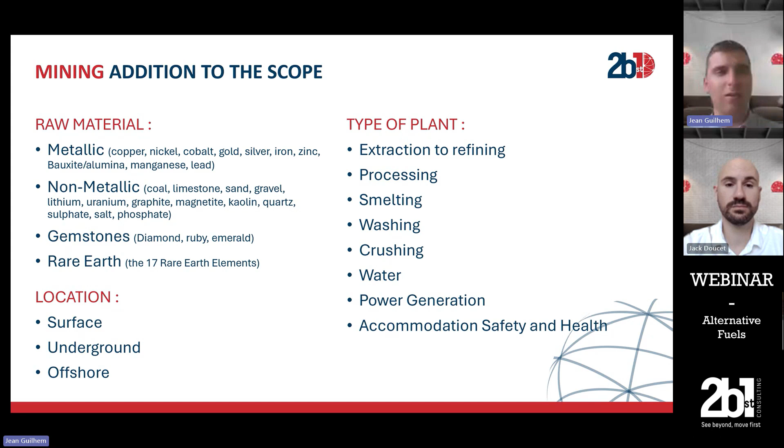Same story for the geothermal. It can be to power or to produce electricity or to produce heat. We'll have it all. The idea is you see between open loop and closed loop, or if it's a heat pump or power generation, etc. We'll have all the details of every model to make sure that our estimation of your product line and your service are always quite accurate.

So you will start to receive those news. If you have any question regarding the scope, feel free to come back to us. If you have any feedback regarding those estimations and that information, feel free also to come back to us. It will grow, of course, and by the time we get maybe some maturity, it will be our pleasure.

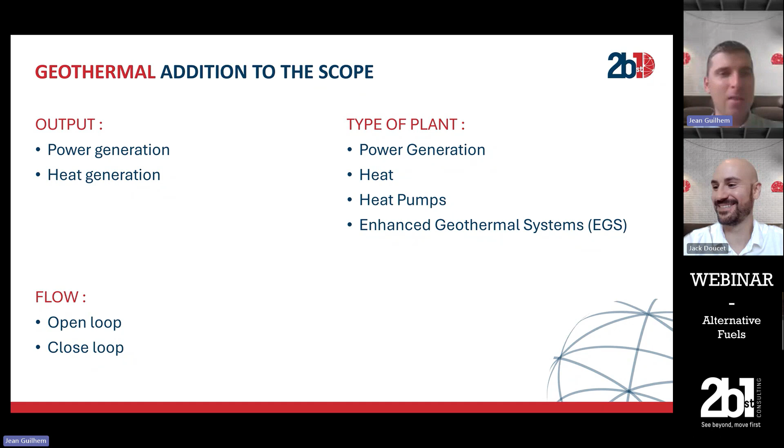Enough about those news, it's already quite a lot. As you can imagine, we have been quite busy this summer doing that. But like you, we like to take that time, which is a little bit of a slowdown, to work on our internal topics. Now going to the topic of alternative fuel, because that's the game for today.

The idea was to say, okay, it's really a hot topic. We hear it a lot. We see it in the news everywhere, but we hear a lot of mistakes about it, and a lot of approximation about this market. So what we really wanted to do first is lay down the definition of what is behind those alternative fuels, because people can sometimes confuse them.

In fact, there are 3, or let's say 4 words, wordings that we hear a lot about those alternative fuels. Here they are: biofuel, e-fuel, syn-fuel, and renewable fuel. While some are really quite different categories, it's not completely exclusive. Some are part of the others, etc. So we try to put a definition.

For biofuel, usually it's quite well understood. It's a fuel that is derived from biological waste. The first example that comes to mind usually is farming waste or plants — if you cut your grass, you're going to produce methane from it. Those fuels are quite great because they have a negative carbon footprint, because usually if you leave those wastes to perish in the air, they will transform to methane. So just by transforming them into CO2, you are reducing the carbon footprint. The main examples are, of course, biodiesel, biogas, bioethanol, which we can see popping up everywhere, especially in US and Europe. It's quite well understood.

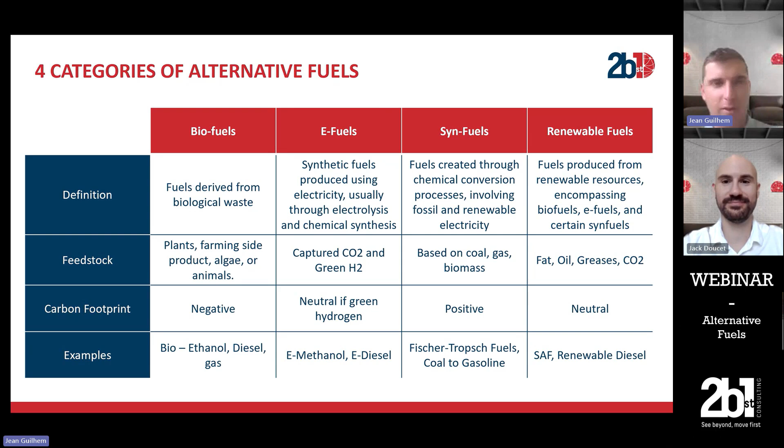I hope that's a high level definition. We can go into the details of everything, but we won't have enough time with this hour to do it. I think it's quite interesting to take two examples to discuss it—two examples that you have heard a lot of, I'm sure, and which are quite pragmatic because we are already using them. The first one is e-ethanol.

Which is a direct recycling of CO2 and H2, because ethanol is only two atoms of carbon and an atom of oxygen with the addition of hydrogen. And I say we're already using it because in North America, Europe, and also South America, you can start to see it, which comes in addition, in mix with gasoline.

In Europe, it's called E85. In the US, I think it's called super ethanol. So that's a kind of fuel which is already used not only in road transportation, but also in maritime transportation. And it can be used as a fuel, but can also be used as a feedstock for petrochem to produce plastic and other types of products.

And the good part is that when it's produced through a clean process, mostly using green hydrogen today, you can reduce this volume of emission by 90% compared to normal ethanol. So it's quite interesting, quite massive in terms of carbon footprint. Today we are not at this size to replace everything, but by starting to combine it with other fuel, you can drastically reduce the emission of other fuels that are mixed with.

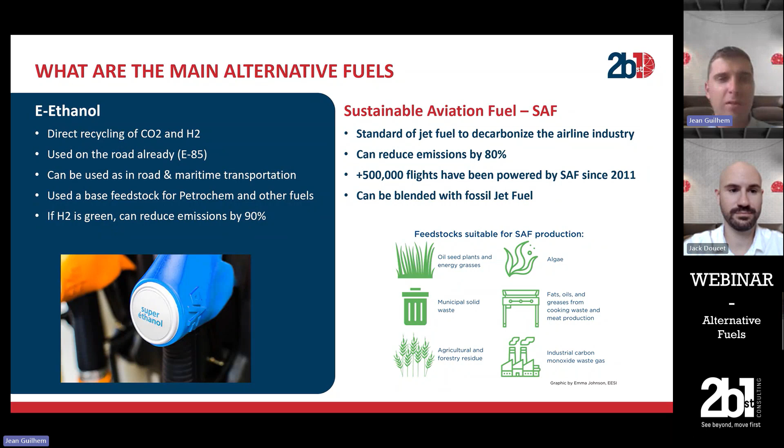So I'm sure those examples normally ring a bell in your mind—maybe not in your business yet, but be sure that it will come. Now, in terms of market and usage, it's good to say that it's happening, but how much, and what are really the use cases behind it, can be a question mark for you.

And in fact, when you think about the usage of those e-fuels, it's quite an efficient answer to climate change, because you can really reduce carbon emission massively, if not being neutral, sometimes even be negative. So it's quite a powerful tool if you think about it on the whole life cycle of the carbon. And the idea behind it is quite simple.

Today we produce fossil fuel, we extract the carbon from the ground, then we use it and it goes to emission. The idea here is, as soon as this fossil fuel is produced, to reuse it once, reuse the carbon molecule, and close at least once the loop of carbon.

You can imagine that it's quite virtuous in terms of idea. It works very well because that's less production you are going to have at the end of the day. The real idea behind is to use the carbon molecule as a vector of energy and reuse this molecule as much as possible before going to emission, and at least try to avoid those emissions.

It's also a good solution, especially if you're in Europe, where energy sovereignty is becoming a big issue, since you can reduce your dependency on imports from the Middle East, from Russia, from the US, by reusing the carbon molecule you already have. To do so, you need to create jobs to produce biogas, e-methanol, etc. So you can recreate value and jobs in your own ground while also reducing your importation from other continents.

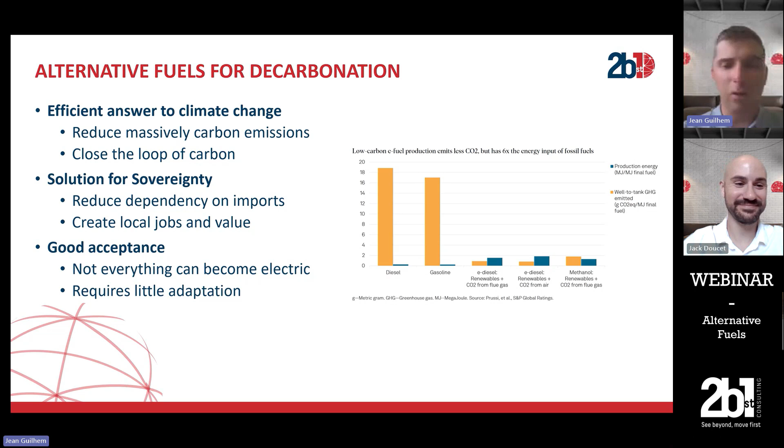So one of the ways out that producers are trying to push to political people is to say, yeah, we can push this to the market, make it profitable, and make people change to e-diesel and e-gasoline, but you just need to reduce the tax on gasoline. It's a big question, not sure if anybody has the answer to that, but that's a way out that could inject e-fuel quite actively and quickly into the market at a low price.

Now if you look at some news about e-fuel, you can see that it's attracting interest from all over the planet and from all different types of actors. Of course, the European Union said they will stop all thermal engines by 2035, the only problem being they're not sure how to do it. So the European Union is moving back on this decision and evaluating integrating e-fuel into the law, saying either you will use a thermal engine working on e-fuel or you will use an electrical car.

And I put both in parallel because you see that the brand Porsche is investing millions, and it's already active, investing to produce e-fuel for their cars, because it seems that Porsche's clients are not so keen on only driving electric cars. It's true all over the planet.

ExxonMobil is investing massively into renewable diesel. The US is one of the biggest countries for those kind of e-fuels. The Chinese are investing especially in SAF, a little bit like India. It's a little less true in the Middle East, we see less traction for those alternative fuels there right now, but I'm sure it will come. For example, when Saudi Aramco starts talking on the topic, they put big money on the table.

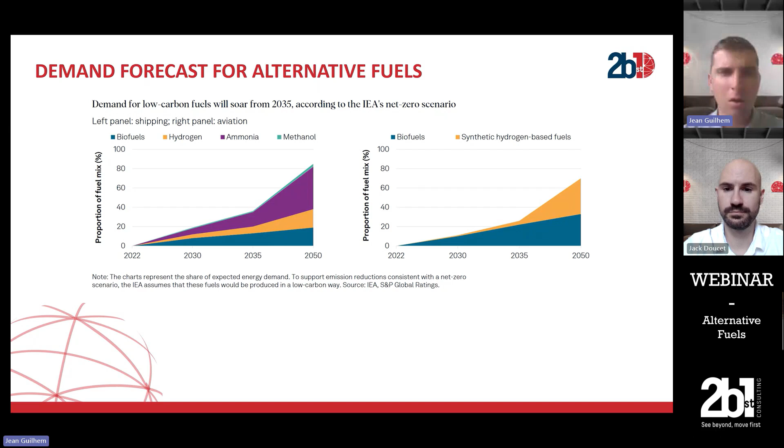If we look in the detail of those two examples, the airline industry - we all know aviation is a big contributor to CO2. And if you look at the new generation, there is quite a boycott around the plane. It's not true everywhere because every year we hit new records of passengers around the planet. But anyway, the spirit is not good, and the vision is not good. So they are really active into their decarbonation.

And to be honest, they have little solution outside of sustainable aviation fuel. Electrical planes are too heavy, so they just don't fly. And at some point they were a lot exploring the hydrogen fuel. But the problem is that if you want to have the density of energy to make a flight from Paris to New York, you need this hydrogen to be liquid. And as soon as it becomes liquid, it's a nightmare because the temperature is low, the pressure is high, it's super thin, so leakage is a nightmare, and the risk associated with this liquid hydrogen is massive. So it's not really practical to handle.

Also, one of the last issues is that the only company working on the turbine of hydrogen was Safran, and this company stopped their program of hydrogen engine, so it will be hard to equip any company with that. So really, SAF is the only way out. Airlines have to become carbon neutral, and of course political bodies like the European Union are super aggressive into targeting those airlines with emission reductions and putting a lot of fines onto those companies.

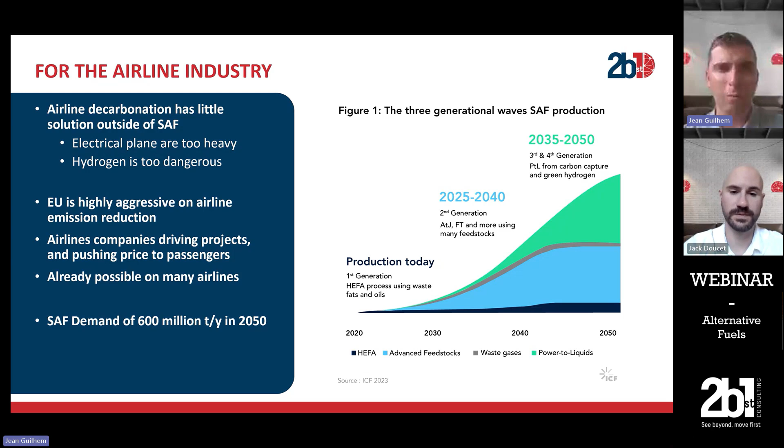So you can imagine the volume of projects you need to produce this volume of tons of SAF, because usually the size of the project is more or less 1 billion for 1 million tons. So it's a lot, and those projects really make sense when they're close to an airport, which means, like we are seeing today with the first developments, each airport will have its own unit of production, so it's a lot of projects that will come all over the planet. For maritime transportation, like in aviation, they have more or less no way out of those e-fuel or biofuel and syn-fuel.

Electrical boats don't really work on this kind of distance, and making them work on hydrogen is not super efficient either. So it's not really practical. It's better to use e-fuel, especially on those long distances. The only problem is that, unlike aviation, the maritime industry uses different types of fuel. For a long time, they used super heavy crude, quite toxic, high emitters of CO2. Over the last 15 years, they have changed a lot to use LNG or lighter fuel to make sure they could reduce massively the carbon footprint of the ship, to the point that today they are using a big variety of fuel for those ships. And the problem is that today, which fuel to use is a big question mark.

The good part is that they have the association, the IMO, International Maritime Organization, which is pushing hard for decarbonization with reduction targets. Here I put the two reduction targets: 5 to 10% by 2030 and 70% by 2040. So it's quite massive, super aggressive, which means that any tankers, for example, that we know very well in our industry, will need either to be revamped by 2040 or to be scrapped, to have a brand new ship by this time. So it's a lot of investment that needs to be made.

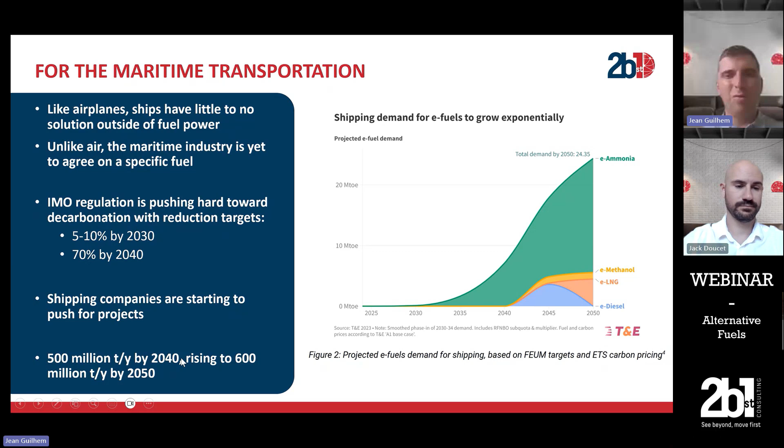Now, if we look into project design, it's quite easy to say, okay, this is e-diesel, this is biodiesel, and honestly, few people know the difference between both. And already within each category, you may have differentiation which is quite important to note. If we start with biofuel, which I would say is sometimes the easiest to get a hand on, today the first generation or current generation of bio-waste or biofuel projects we have is recycling bio-waste, meaning you capture waste from agriculture, farming, or from forests, and you make a process of transesterification where you split with alcohol the fatty part and the oil part, and you produce a fatty acid methyl ester, known under the name of FAME, which is a little bit more sexy to be used.

Usually here you're going to produce biodiesel, which is not really diesel, by the way. It's not the same molecule, so that's why it's mixed with diesel. It's quite different from the diesel we produce from fossil fuel, but it works in your motors, so that's why you can use it.

Here the projects are around 500 million, more or less, and produce 1 million tons per year. Those projects are really well situated around farming and agriculture areas. It's a good way for farmers to value their waste, and we start to see some farms making more money from these biofuels than from their farming activities, especially in the US. But it's quite limited because at some point we don't have enough feedstock or waste to produce more biofuel than we could be doing in the next 5-10 years. So it will have a limitation.

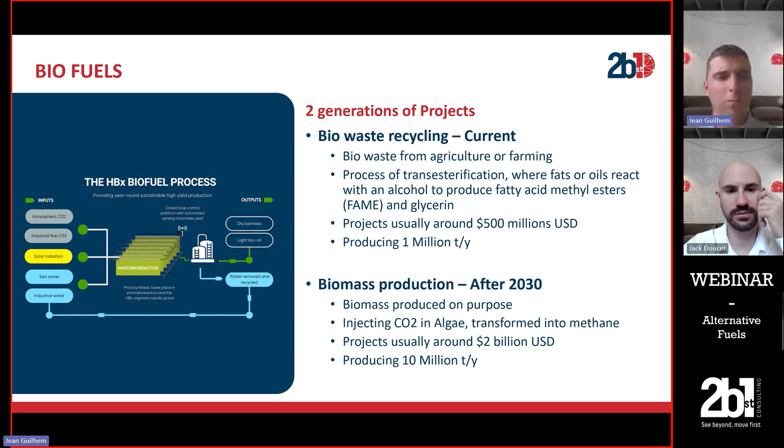Another process is renewable fuel. Here you can use the same feedstock as the first bio-waste process - cooking oil, animal fats, bio-waste. But it's not going to be the same reaction. Here you push those wastes at high temperature and high pressure with H2.

When you do so, and I hope at least with green H2, it's going to break all the carbon molecules and triglycerides to convert them into hydrocarbons. This is quite different from the FAME reaction we talked about before, because here you produce a diesel which is more or less the same molecule as diesel from fossil fuel. So it's the same quality, sometimes even higher quality. By using this system, as you're again recycling CO2, you can have a carbon footprint that's even smaller, reducing the carbon footprint of your product by 80%.

We start to see it popping up quite massively, especially in the US, where for the first time 2 years ago, renewable diesel production was higher than biodiesel. Those projects are more or less always the same size because they depend on the feedstock, so there's some limitation. But that's why they're quite well positioned in the US, where farming is quite massive, and the capex is above 1 to 1.5 billion US dollars.

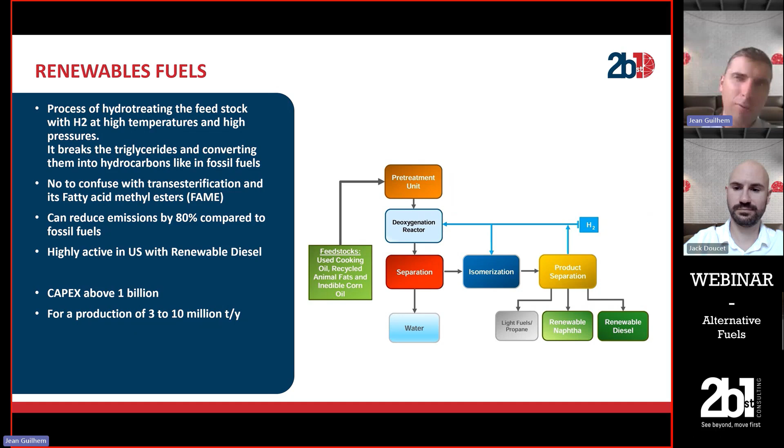Of course, the problem is that you need the feedstock, you need the hydrogen, and you need clean electricity, which today, as you might know, is a little bit short for the moment. But when you look at 2050, you may imagine that could work.

Now going to e-fuel, and here the idea is to reuse CO2. As simple as that.

So you take your CO2 from industrial usage and you are going to reuse it one more time. Usually there is a little project when we follow them around the planet which are tagged or labeled as e-fuel, because e-fuel can mean a lot of things and people can be confused. So usually they are tagged by the end product.

So they are tagged as SAF, Sustainable Aviation Fuel, or tagged as e-methanol, green methanol. Really the end product is what makes the name of the project. Here it's a reaction made through a catalyst, sometimes iron, sometimes copper, with high pressure and high temperature, and injection of steam to produce methanol for e-methanol and water, but also to produce jet fuel.

Those projects are slightly smaller, to be honest, because they consume a lot of hydrogen and energy, but you need to have pure CO2. So usually you find those projects close to an industrial park, where the density of CO2 in the gas is quite stable, so you can isolate it and then re-inject it.

But anyway, the volume of production is quite massive because those molecules are quite heavy, and you can easily end up with 100,000 tons per year of production. Again, those projects pop up all around industrial complexes and airports, either because you have the feedstock CO2, or because you have the need for the usage of this SAF.

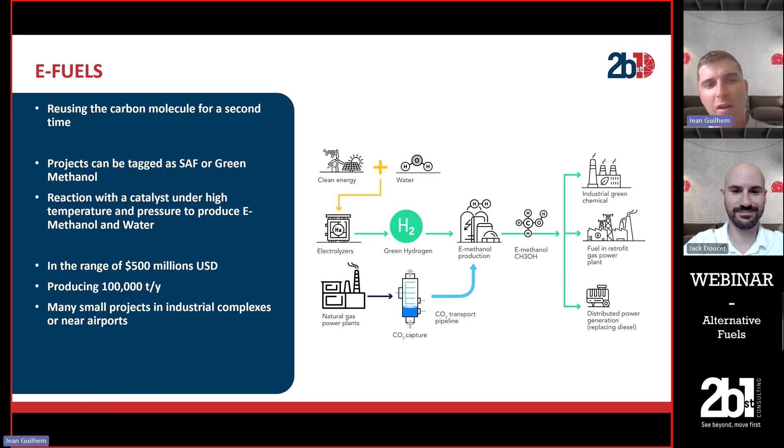So it's quite interesting, and you see some companies becoming experts on those projects and becoming a kind of licensor for them. Last but not least are the Syn-fuels.

Here, with Syn-fuel, we find not so many projects, and we find them in countries with high reserves of coal, because coal, as you may know, emits a lot of CO2 when used. So people are not so keen on using coal straight away. So the idea of Syn-fuel processes is to reuse this coal, and you are kind of going to bake it in a way or another.

The first step of using this coal to produce gas and gasoline, or also to be used in fertilizer, is to make a gasification process by injecting steam and oxygen at high temperature, around 1000 degrees, to cook this carbon and make a reduction of the carbon molecule. From coal, you can end up with gasoline and heavy oil as output.

Usually those factories are quite massive in size. They are well known in terms of process, but to be competitive in price, you need to have a big size for it, and you need to have coal which is ready and cheap close by. So it's a big capex, but also big volume of production with good quality.

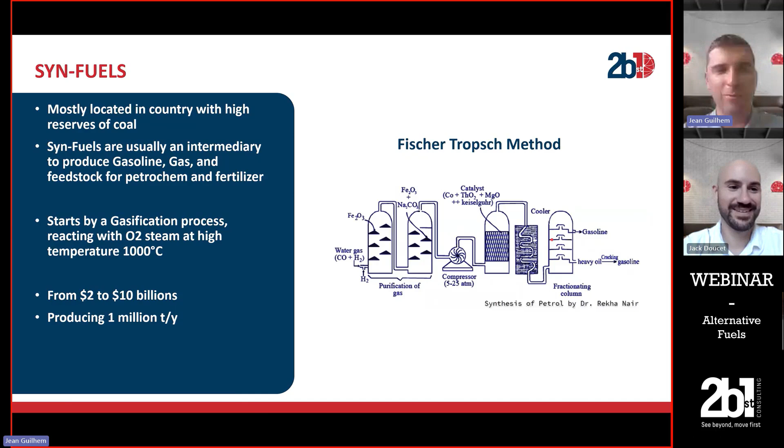Now passing the ball to Jack, who will have a look at the business side of those projects. Thanks, Jean, thanks for this explanation.

I saw in parallel that it already triggered some discussions, everything that you said, so we'll have a lot of Q&As I guess. But first let's have a look at how everything you say translates into projects, because alternative fuels are not exclusive to this. There is a lot of announcement, and the reality is sometimes a bit different, but a lot is happening.

But alternative fuels, as you'll see later in the slide, call for the same actors, meaning there is still a bottleneck in the supply chain that they are facing. So some projects will still potentially be awarded before the end of the year, but part will have to be postponed to '25, '26, and '27 for the rest. So for that, they are treated like the rest of the projects.

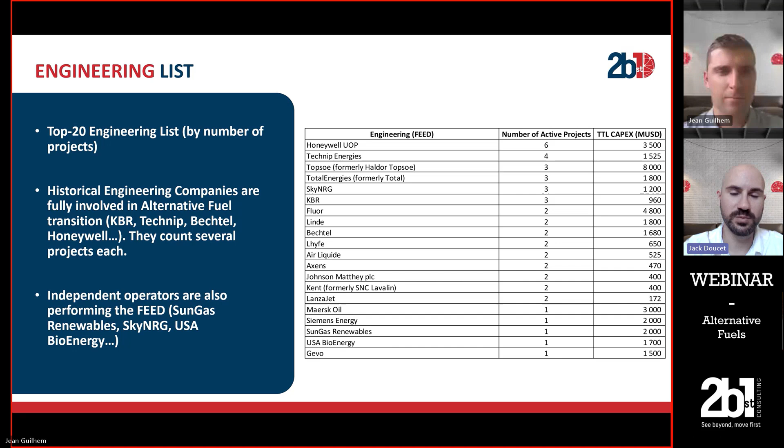As we want to have a bit of time for the Q&A, I suggest we jump now to the conclusion, Jean, maybe before actually taking the first questions. Thank you, Jack. So going to the conclusion, then we'll jump to your questions - so feel free to start asking them. We have Jean-Charles with us today, so if we have tough questions, we'll pass them to him.

But just the few key points of today: clearly alternative fuel, e-fuel, and all those fuels are a crucial tool for decarbonization. I mean, it's impossible to think that we could decarbonize everything and make everything electrical. Clearly, that's not the case.

So those fuels will have a role to play in this decarbonation and energy transition. The good part is that they are easily adaptable to our energy system as we have it today, and to our usage of energy. So usually they are quite well accepted, a little bit better than changing the solution. People are quite keen on paying more for those solutions.

Also, they are clearly the solution for sectors like aviation or maritime fuel, where there is really no other way out. There's no better solution than using the carbon molecule for this energy. The challenge is really how to stop the emission.

As we try to explain, those processes are quite new, highly specific. But if you are familiar with petrochem, it's nothing completely new. We have known these processes for quite some time. It's just that today the size and number of projects using those processes is increasing. And of course, if you have a solution for any type of these processes, you should go for it, because it will pop up everywhere.